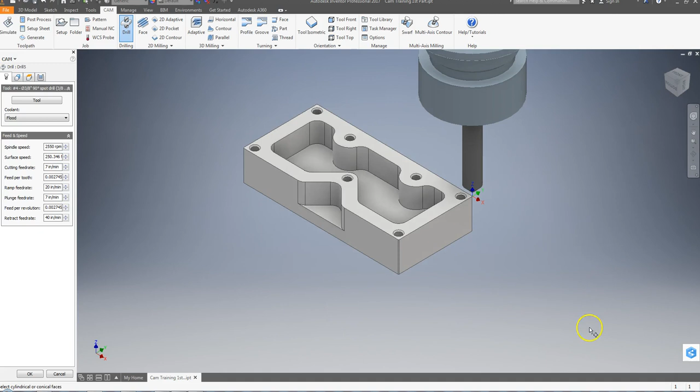So we're going to drill. And we need to pick our tool. And we're going to go to CAM. And the tool is going to be the 3/8 by 90 spot. Select. So it puts all my speeds and feeds in.

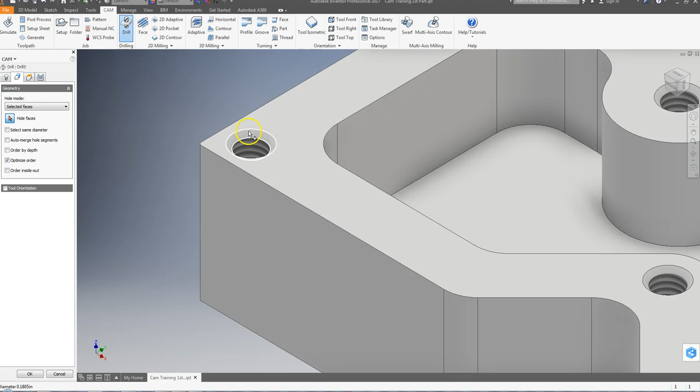So now I can go and pick either faces or points. I got faces, so I want to pick this top, because otherwise if I pick this circle down here, this is lower than this. This is my top of my part. So at any rate, I'm going to go with this bigger circle here and pick it. It will do it in the order you pick it. So I'm going to end up there, so the next time I'm going to want to start there. So keep that in mind.

Hopefully I'll remember. So here we go. We're spot drilling. So again, model top, 0.1. Don't know why it doesn't remember it. Model top. Oh, I'm sorry. Model top up here should be 1.0. Maybe it did. Model top, 0.1. Feed height, model top, 0.1. I don't know if you noticed over here, but as I change the numbers, these planes move up and down.

Hole top. I'm going to go with model top just in case I picked an inner hole one time. So bottom height is the bottom of the hole. And in this particular case, for the spot drill, I don't want to do that. I want to go a certain distance from the top, half of the diameter. So let's say I wanted 212, because that's 6 is easier to be divisible. So that's like 106 deep. It should give me a 212 diameter. So I'm going to say from the model top, I want to go down 0.106.

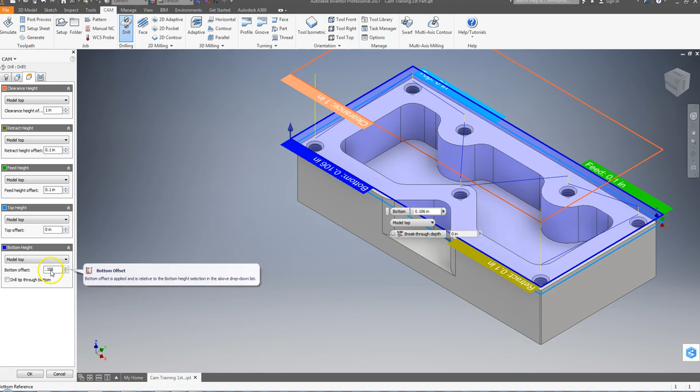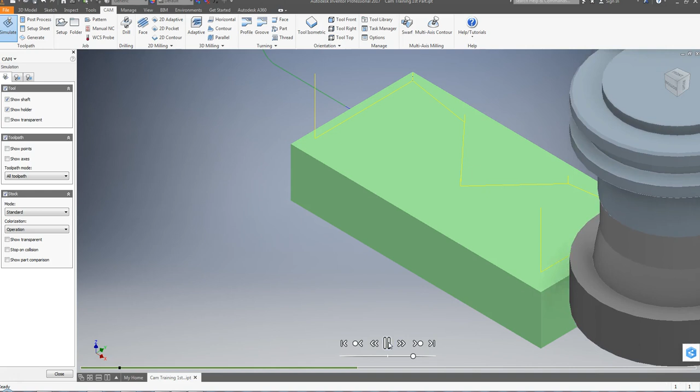So let's see if I want the right way, or is it a negative. So we're going to pick OK. And we're going to face it. I'm going to hit Control and pick Drill. That way it'll face the top and it'll give me the right visualization. Simulate it. So it faced it. Well, that's not it, because let's watch it. Say it's at 100, it's not doing anything.

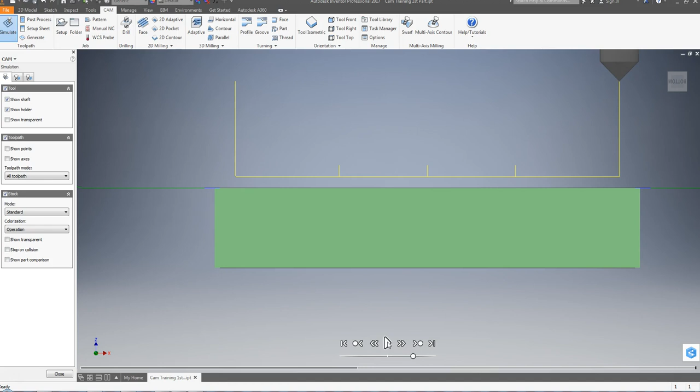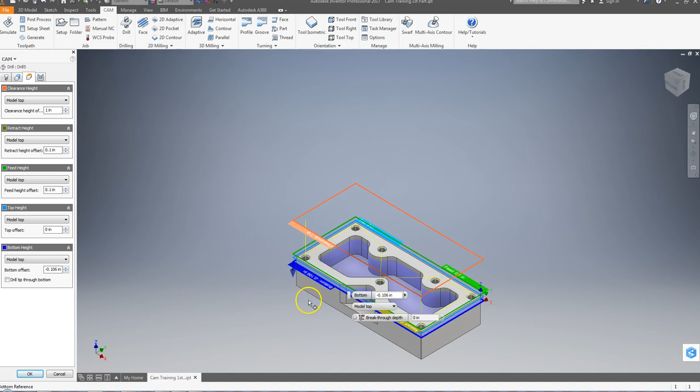But remember, I was going 100 thousandths on my rapid and my feed. So close this, back into drill, back to this last one. Oh, I'm sorry. And I forgot something here. So model top, I want to go negative. There, see, it moved this in. Bottom, minus 106. So if I look from the front, that blue one, that's where my point's going to do, 100 down. Below. That is what I wanted. I should have looked at that last time, but I forgot.

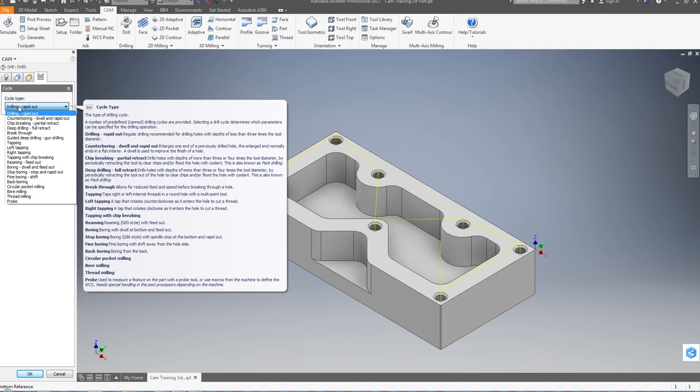So, I also forgot to come over here to the last tab. What kind do I want to do? Regular drilling is going to be at G81. It's going to drill from the R plane down and come back up to the R plane. Counterboring will dwell and come back out. Sometimes if you do that, it chatters. So I'm just going to use drilling.

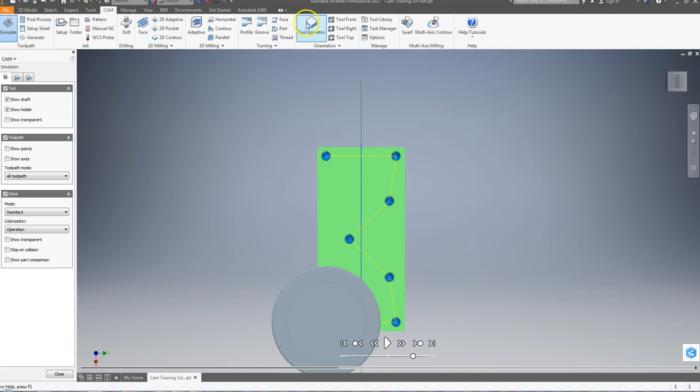We'll say OK. Again, I'm going to pick face and this, simulate, go, so we can see what we got here. It's better. Okay. So it looks to me like it chose its own order. Because I picked around and it picked that one, which kind of makes sense because it's probably closer. So that's the hole I ended up at, so that's the hole I should start at when I pick. Hopefully, if I forget, it remembers.

So I want to drill a hole now. Actually, why don't we use one of the things we did before? Let's duplicate it, or copy and paste. I think I saw duplicate. Duplicate. Boom, there it is. So let's click, wait a little, click. This drill 5 was spot drill. Pick this. We'll just leave that. That's regular drill. So double click. We'll edit it. It picks the same holes automatically.

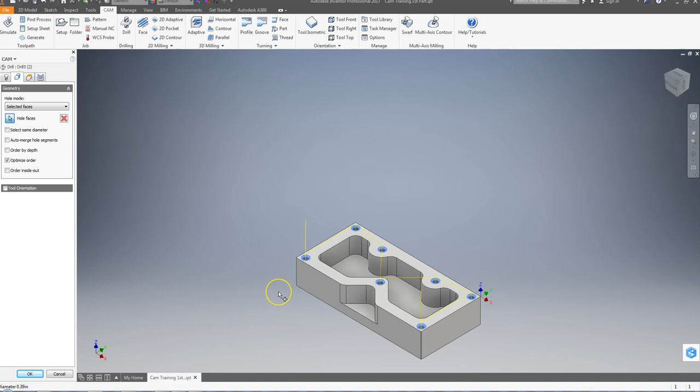But let's say I want to pick the ones that go in this time. I don't want to pick the ones up top. If I hit X, it deletes them. Now I can pick this, and I can pick that hole. Now I'm going to pick the inner one, so it gets the depth, the hole depth, as an option.

So here, since I did copy, all of that's there. Now this bottom offset, this I've got to change because that's going to go right to there. I want to change this to hole bottom. So it went to the hole bottom, but it's also offsetting it, making it another 100 down, which I don't want to do. So I'm going to make that 0.

Now this is a deeper hole. I want it to go in, rap it out to get the chips out, come back in, rap it out. So that's called deep hole drilling. Deep drilling. So here's my peck. Now we can get fancy with all kinds of stuff, but what works pretty good is about 100 thousandths. Minimum peck, maximum peck. So like I said, you could get really fancy, but we want to just do 100 thousandths. So we're deep drilling, 100 thousandths, everything else is the same.

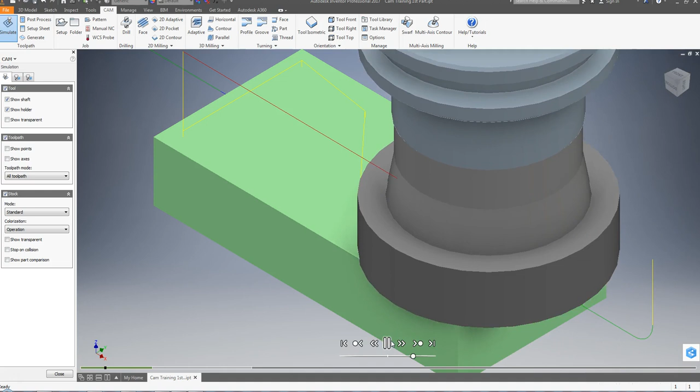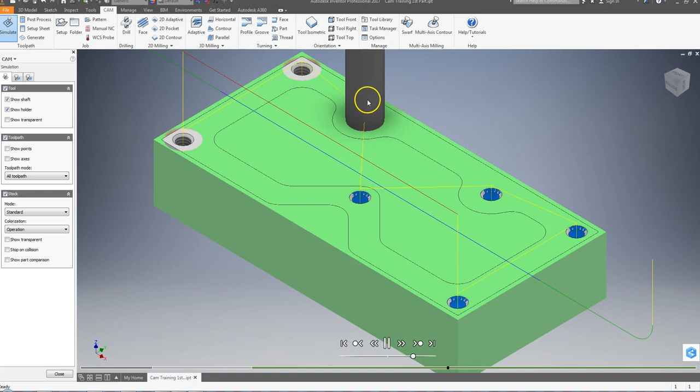Let's base, hold control, drill, spot, because I don't need to see the other ones. I'm satisfied with that. So base, then we'll spot, then we'll drill. Something looks kind of odd there, huh? Oh, that's the center drill, the spot drill. That's not right. That's why it looks weird. Close that. When I copied it, I forgot to change my tool. See? #4 spot drill. Well, no wonder it looks bad. Cam, 159 drill, select, fixes everything. Don't have to change anything else.

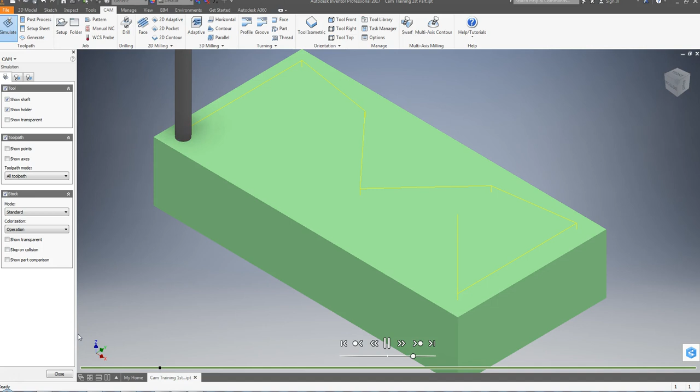Okay. Just for the heck of it, let's just see if this does what I think it's going to do. Oh, that's a little bit better. See, there's the hole down in there. Ooh, some graphics issues there. Let's go back to tool isometric. There we go. So it actually worked. Beautiful. Close. That worked. Now we need to tap it.

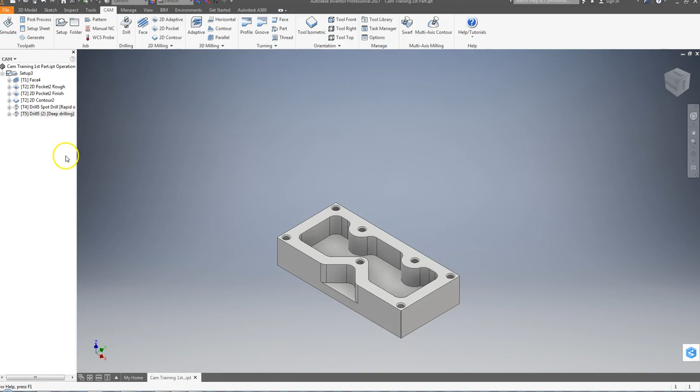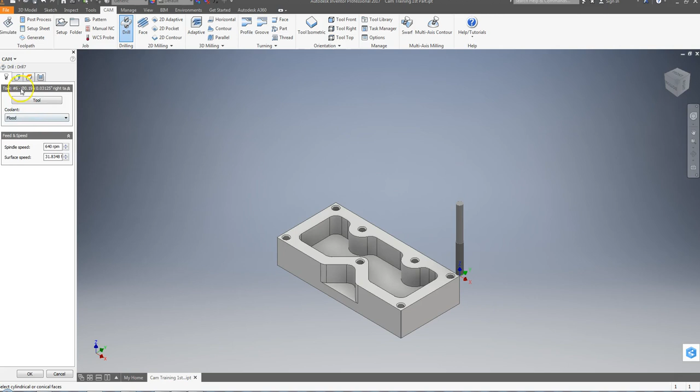So we're going to do another drill operation. And I'm doing this differently because I want to change a couple of things. So cam, tap, select. So I got the right tool. It picked up my RPM. I come over here, holes to machine. Let's pick the hole. Okay, oh here, optimize the order. Okay, so there's a couple of choices. If I turn that off, it'll pick the way that I did it. Otherwise it optimizes it.

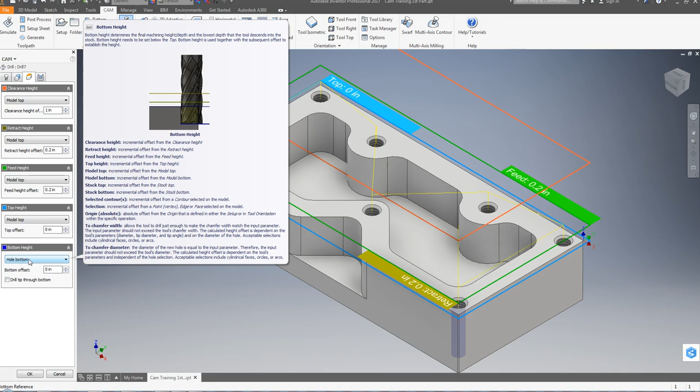Okay, so here, model top, 1 inch, model top. But this is a tap, so I want it to be 200 thousandths. Model top, 200 thousandths. I'm going to continue to go with model top, so it gets me the right depth. And I don't recall the depth of my threads, and I don't want to smash it into the bottom. So I would look at my print, which I don't have currently available, and I would say, oh, I need to go this far. Plus you would have to add the lead on the tap in order to get it correctly.

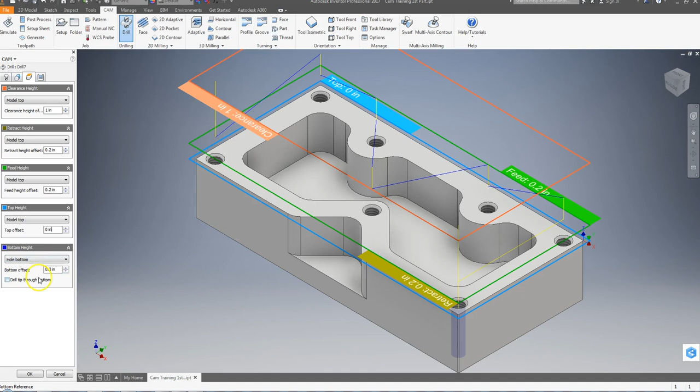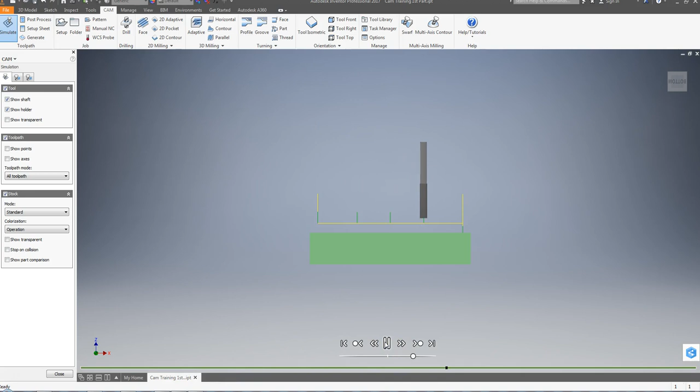So how I might do that is I might leave it at hole bottom, and then raise it up 300 thousandths, so that should bring it up from the bottom of that hole. Or I can do model top and do a negative number, that'll work. But let's see if this works. I think it shall. Simulate. Go. Well, it's picking up high, isn't it? It's not going down. Or did it? Reset. Run it. Nope. Why it did it there is beyond me. So I'm going to say I got something wrong.

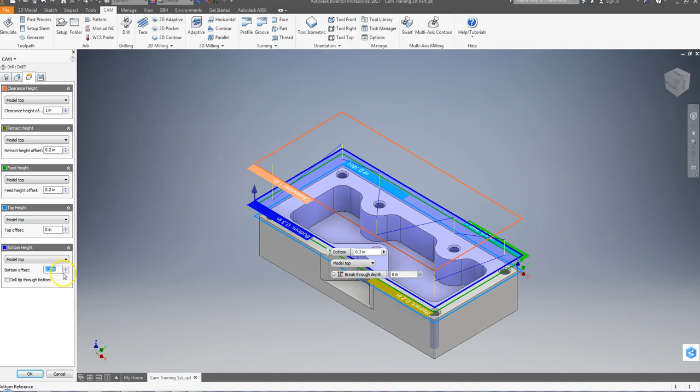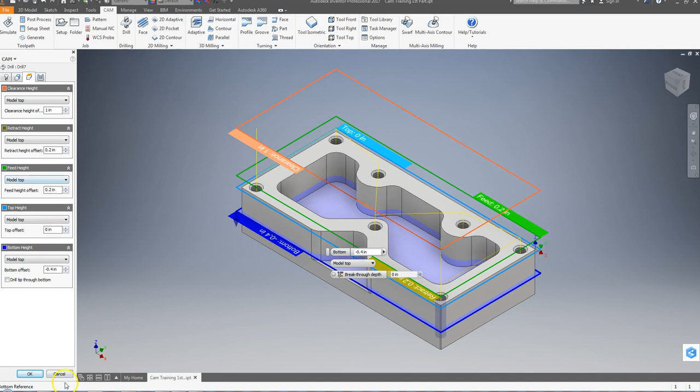Drill, I'm sorry, I changed it to tap. So it didn't like this. So I'm going to say model top, and I'm going to say minus 0.3. There, it moved it down. Let's look at the front view and see. Yeah, that's where the tip's going to go. I could make it minus 0.4. Moved it down. Model top. I'm going to say OK. Now we're going to simulate. And go. There we go. Okay. So that looks like what I want. Close. Let's look at everything all together.

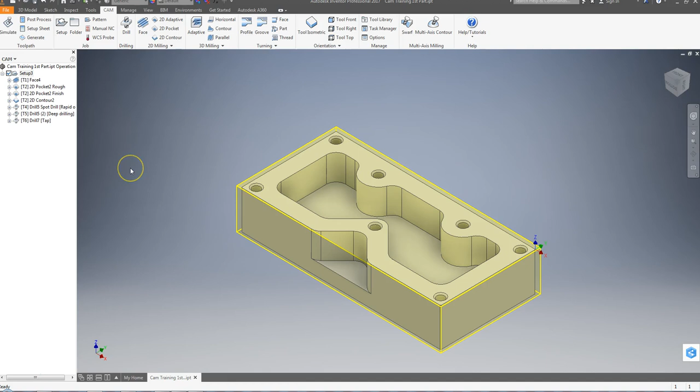Well, actually, let's save. Makes me happy, makes you happy, save. All right, setup, simulate. Let's watch this whole thing through. Face. Notice it changes colors. Makes it easy to visualize. I'm hoping that I don't see any red because that would indicate a crash. Crash is bad.

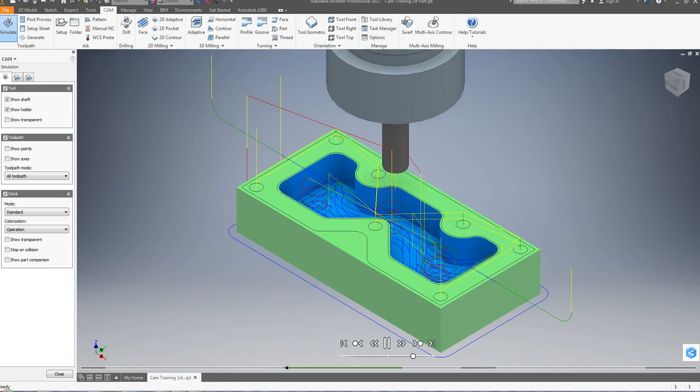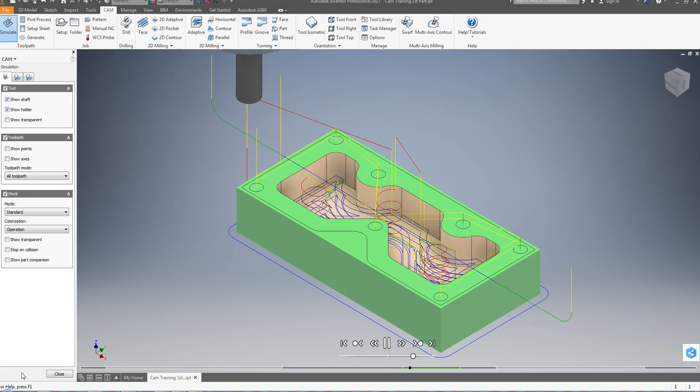Now we are taking care of the bottom. Spot drill. Oh no, mill the outside. There we go, spot drill. Deep hole drilling or peck drilling.

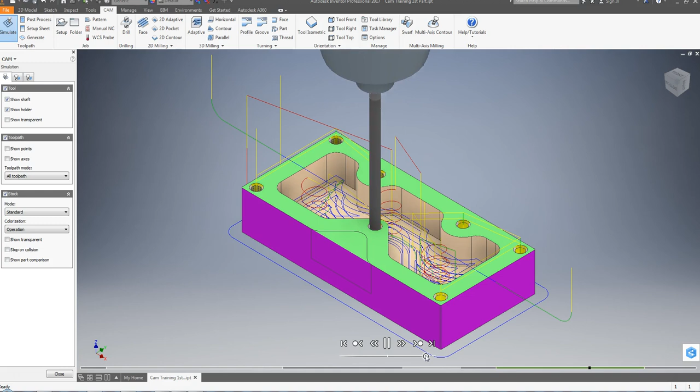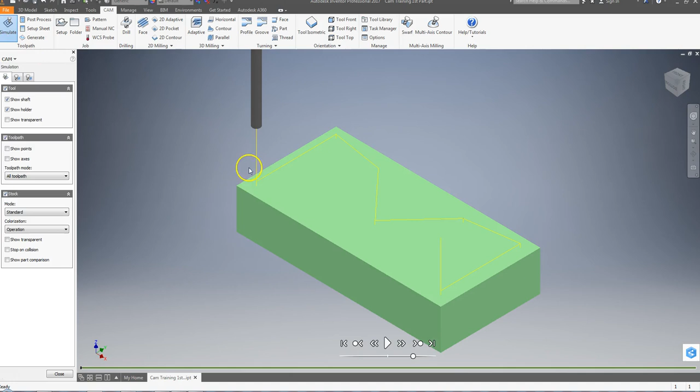Broke the tap because I didn't drill that hole. For some reason it didn't drill that hole. Let's go look at that. What did I do? Drill. Let's simulate that. Seemed like it didn't drill that hole. Or did I just miss it? Ah, I guess it did it. Okay, I wasn't trusting it, so it doesn't take much to go back and look at it.